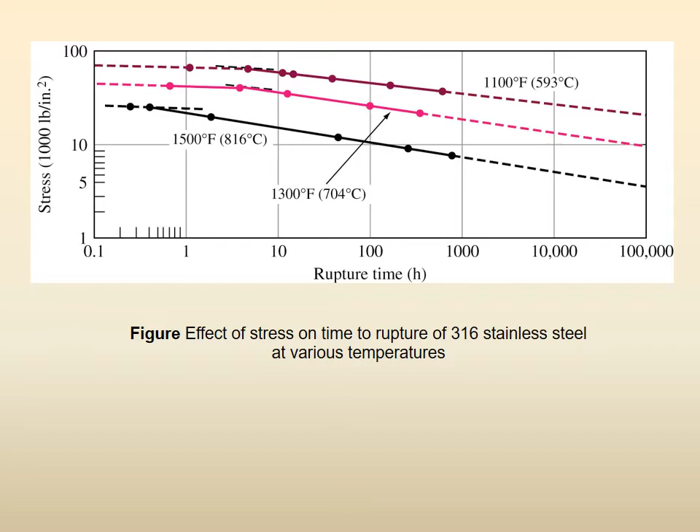Let me show you the graph so the understanding will be very clear. Remember, making this type of graph is a very costly, very accurate, repeatability-guaranteed experiment. So it's great that for the material we choose in our factory and design, we go to some handbook, manual, or material website and get the Larsen-Miller parameters directly. Otherwise, if we want our own creep tests, it is hugely costly.

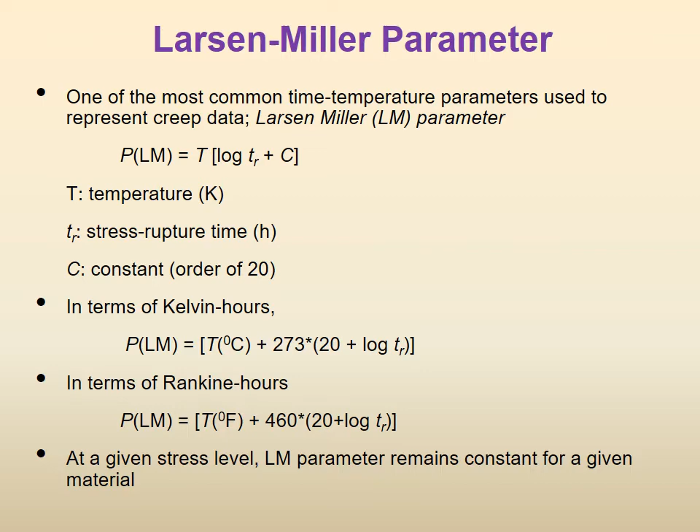So there will be an example - let us directly see it. This is the Larsen-Miller stress rupture strength of directionally solidified DSCM247 LC alloy versus DS and equiaxed MAR M247 alloy. It's the same material - M247, M247, M247 - but under different conditions of heat treatment and rolling, the crystals are different. So it's the same alloy, but heat treated and cold rolled differently.

But for any one of them, here they are showing stress in megapascals, and as we always see, KSI on the other side - so whether you are working in Europe or the US, it is there. Below is the Larsen-Miller parameter in the Fahrenheit scale or Celsius scale - Celsius meaning Celsius plus 273. So the governing equation - that's why I said earlier let's not worry about the equation - the equation is directly here on this page. If you're using Fahrenheit scale, this is the equation; if Celsius, this is the equation.

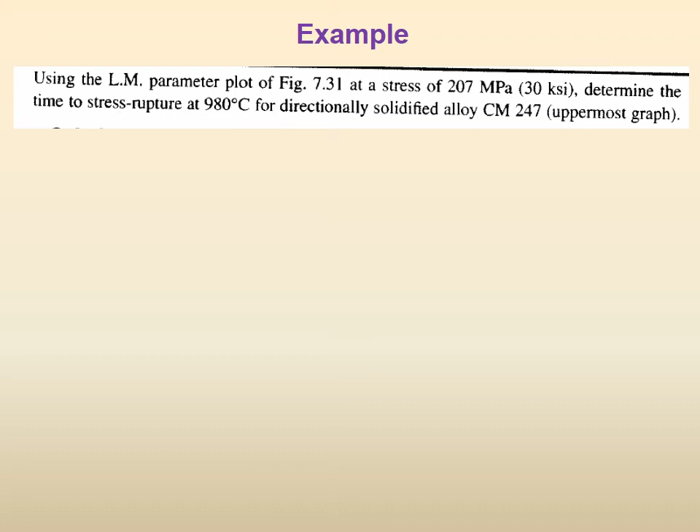That I know that in my company I am using this one or two materials. So I get the Larsen-Miller parameter graphs for those two materials, and I enlarge them and print them on A3 size, right? And then if I draw a line, then it is much more accurate because the graph is now much larger. So whatever you want to do, the only thing is the slight inaccuracy. Otherwise, in terms of difficulty, there is nothing, right?

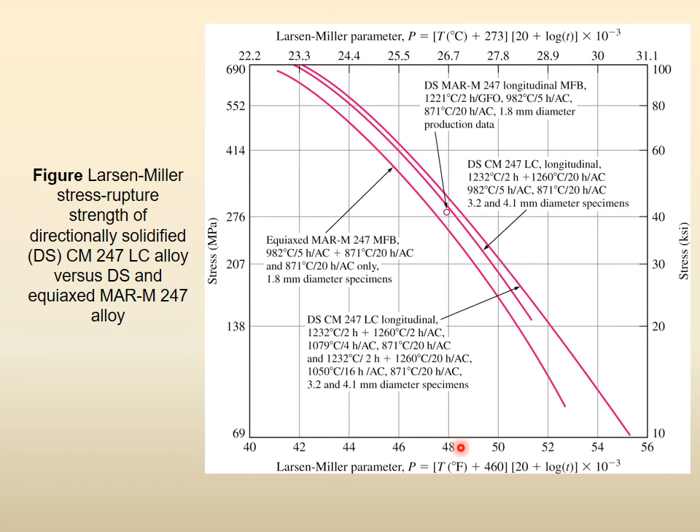So this is the graph, and they are saying uppermost, right? So this uppermost. So if a stress is given, then at that stress level go and cut the uppermost graph and read the Larsen-Miller parameter either in Fahrenheit or in Celsius, whatever you want, right? So 207 megapascal, 207 megapascal. So just go to the Larsen-Miller parameter for the uppermost, and we will see that the value is roughly 27.8 into 10 raised to 3 Kelvin hours, right?

Which means that we are using the upper equation, the upper side, not the lower side, because we are adding the 273. So the equation is Larsen-Miller parameter equals temperature in Kelvin into 20 plus log TR, right? So, 980 plus 273 is the temperature. So put 1253 here. The Larsen-Miller parameter, whatever value you found from there.

So this is the Larsen parameter value. This is the temperature, and inside it is written 20 plus log TR. This is the normal log, not ln, not log to the base e, normal log.

So now take log of both sides or whatever you want. So first remove the numbers, separate out log TR. So log TR is equal to 22.19 minus this, it becomes 2.19. Then take inverse log on both sides, this becomes TR, that becomes 155 hours.

Now this is what the book has calculated. I always find that by 2 or 3 decimal places, this, that, a little bit of more accuracy is there. So this answer may be wrong by half a number or something. So you write what your answer is.